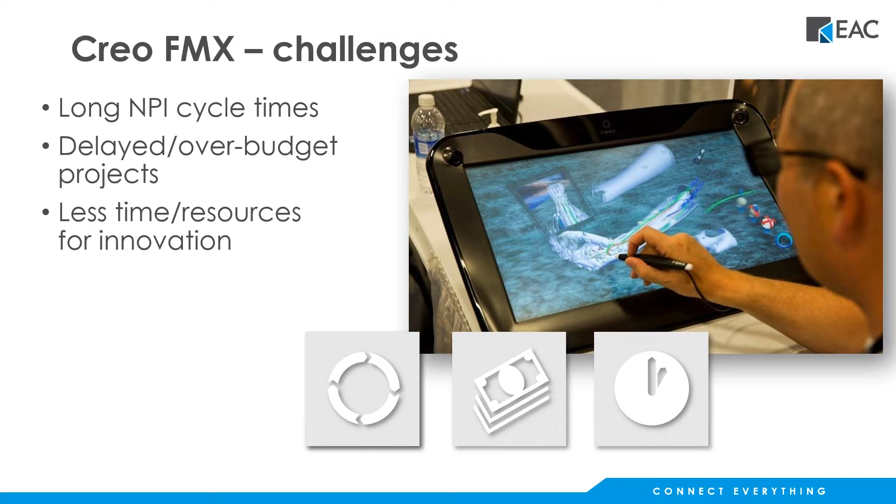What does that result in? Delays, over budget as far as costs and that type of thing. You run out of time towards the end of the project, and it takes away from your ability to innovate, and it just is not the most cost-effective or most efficient way to actually do product development. So what happens? You potentially lose out on market share or profitability, and you're not making as much as you probably could. So enter into the scene Creo's Flexible Modeling Extension.

So on this screen, we've got several different images here, and it flows from upper left to lower right. And what we're really showing here, and I'll show this to you live in the software, is working with the geometry and doing direct modeling changes to it. So you can recognize different pieces of the geometry as cuts and bosses and those types of things, and then move those things around dynamically and interactively to put them where you'd like them to be. And this could be done on both Creo native data, or it could be done on non-native data as well.

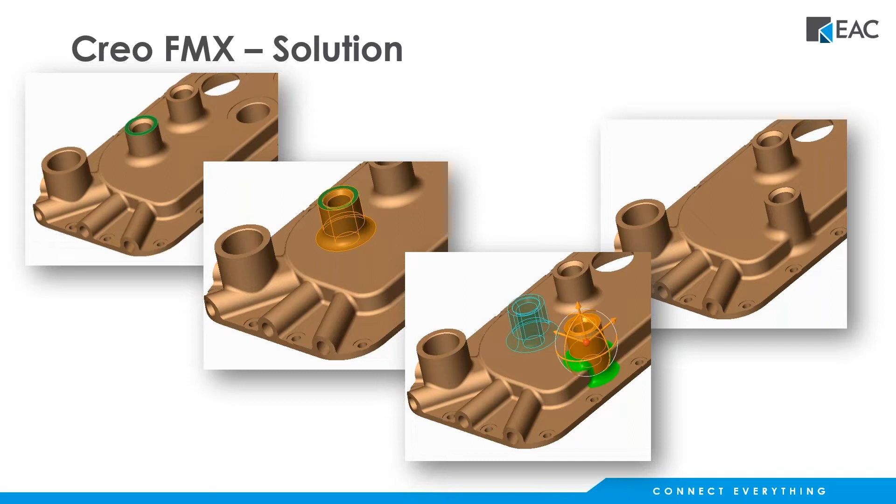So it's some nice functionality that we'll show you live here in just a little bit to do those late stage design changes or work with non-native data. So a little bit about the user interface. What does this look like inside Creo? I'll highlight this when we get into Creo here in just a minute.

But in the upper left-hand corner of the ribbon, when you click on the Flexible Modeling tab, you're going to see the selector or the collector up there at the top. And it's going to be grayed out by default when you start because you haven't selected any geometry. So don't let that trip you up, right? You need to actually select some piece of geometry first before that collector actually lights up and allows you to specify how you want to recognize that piece of geometry.

You also have the ability to recognize patterns and symmetry along with additional geometry types, things like rounds and chamfers, and you can manipulate those items in a really easy to use fashion. Obviously, it's directly inside Creo Parametric, so it's seamless, right? You don't necessarily have to do anything other than click on a different tab inside Creo to get to that flexible modeling functionality.

Note that this will only be available for you while you're either in a part by itself or you have activated a part in an assembly. Otherwise, that flexible modeling tab won't be available. You won't see it because it doesn't make sense to do that in the context of an assembly.

Fast intelligent geometry selection, again, we'll show you what that looks like here, but you basically touch off on a piece of geometry and it recognizes that, and you can specify whether you'd like that to be a cut or a collected series of surfaces that behave as a cut or a round or a chamfer.

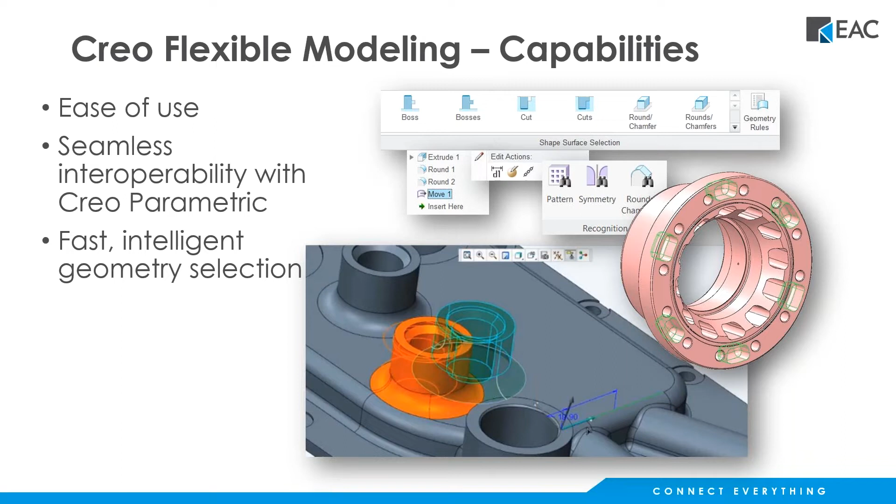Capabilities, additionally, you can recognize patterns, right? So in this case, you can start off with a piece of imported geometry and it'll go ahead and find those other pieces of geometry, whether that's a pattern or if you've got chamfers or rounds or things like that. So you'll be directly modeling and working with the 3D geometry that's inside your solid model.

So that is one thing, you're definitely going to want to have these models be solid. So if you have to heal them up with an import data doctor or something else like that, get that model so it's solidifiable. You'll need to do that before you can do any work with the flexible modeling functionality.

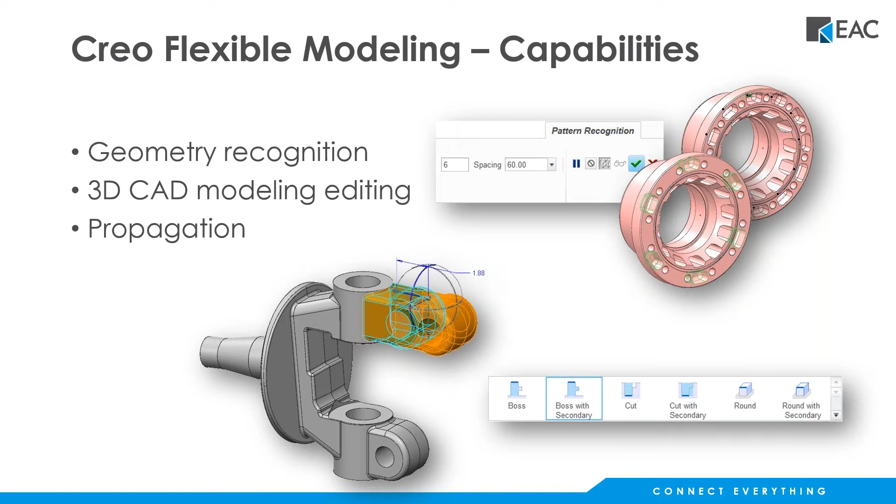Propagation, what we're talking about there is actually recognizing that pattern and then it allows you to edit the pattern. So if you wanted to change the pattern count from 3 to 6 to 12 or whatever, it's just as if you've created that pattern directly inside Creo, even though you started off with say some imported geometry or something like that. So you have the ability to recognize the pattern and then edit that and manipulate that as you need to update your design.

So sort of a summary slide. We have really 2 or 3 different things to talk about. So I'm going to do the slide piece first and then get into the actual presentation and the software afterwards. So summarizing, what have we talked about so far? Creo flexible modeling. The real focus here is on allowing you to work with the model, directly moving geometry. So you're not necessarily editing and redefining features. You can work with geometry as sort of blocks and groups and kind of manipulate them as a whole unit.

And you can do that with either non-native data or native Creo data as a late stage design change. So you don't have to go back and worry about connecting up a series of features and editing the definition to get where you want to go. And the whole purpose for that, reduce your product development time and cost. So you can reutilize that CAD model, maybe make a modification to that and quickly and easily make that change and then not have to spend a bunch of time editing and redefining features. Which can be done, but maybe you're working with imported geometry, so you don't have the luxury of having direct access to those features.

And improving product quality, right, gives you the opportunity to work with different design alternatives, thinking about different ways you can innovate. Remember that this can be done in conjunction with other Creo functionality like design exploration. So you could have different checkpoints along the way where you use your flexible modeling functionality to move or redefine or relocate geometry and have that be different scenarios in your design exploration session. So you can look at different design alternatives by moving the geometry and changing it via flexible modeling.

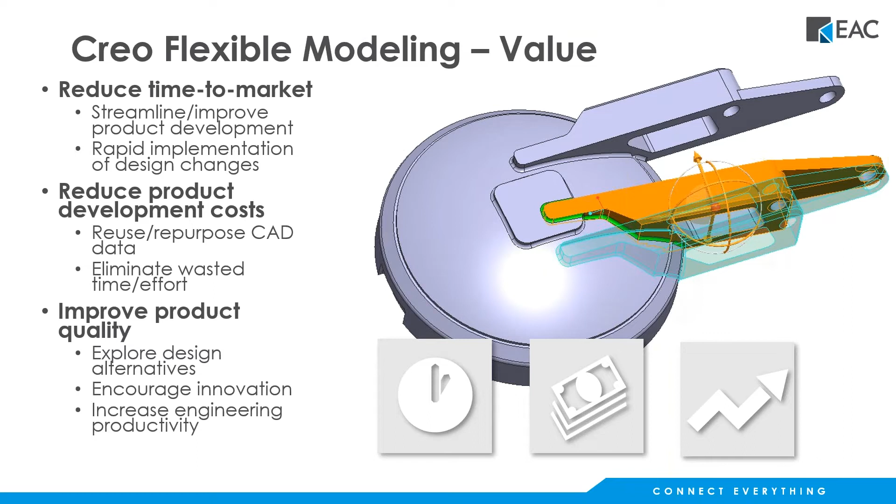Okay, so that's the first piece. The second thing we'll talk about, I apologize for all the PowerPoint up front. What we'll do is we'll string this all together in PowerPoint and then we'll get right into the software after that. So Unite functionality, what's this all about?

Well, thinking in terms of data exchange between different CAD systems, wouldn't it be nice if everybody was on the same page as far as working with Creo data, and everybody in the world used Creo, and then we wouldn't have to worry about this whole issue of data translation between different CAD platforms and systems. Well, that's not reality. It's not the case. It's probably also not practical, right?

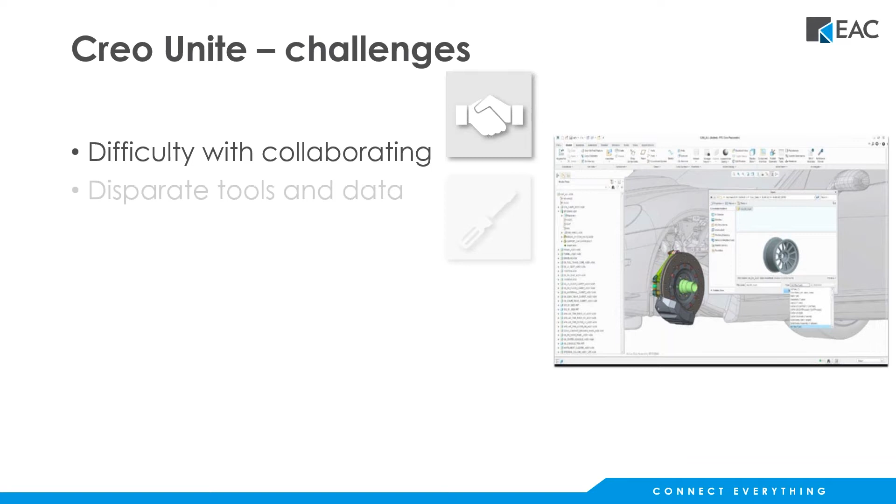So everybody has potentially different design tools that they want to work with, and what the Unite functionality is really all about is bringing that information together. So now you can more easily collaborate instead of having to, like we said a few minutes ago, revert to the lowest common denominator with sort of an industry standard STEP or IGES or some other file format. Let's see if we can find a way to actually collaborate and work together with these different types of data inside one system.

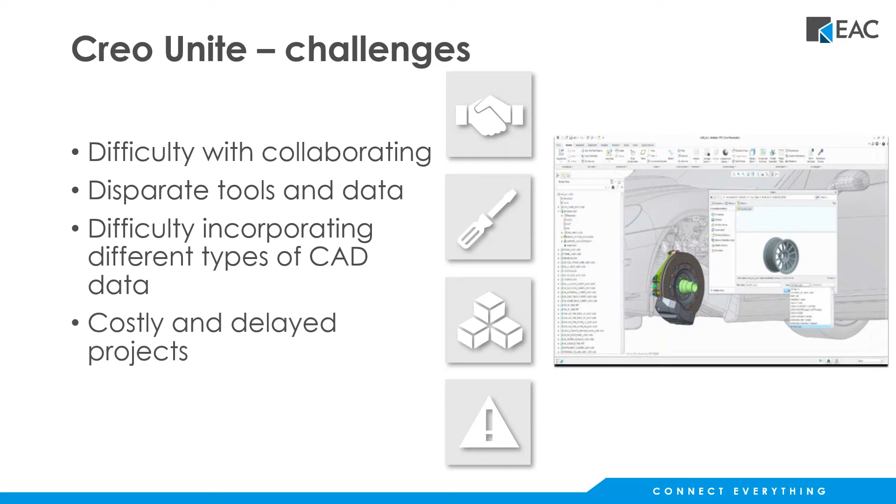So we'll just build out the rest of the slide. There's not everybody, but there's lots of different design tools that can be used. And we have a difficulty in incorporating these different file formats together. And obviously that can result in increased cost and stretched out timeframes and projects being missed because timelines can't be met because you're having to wrestle with this non-native data.

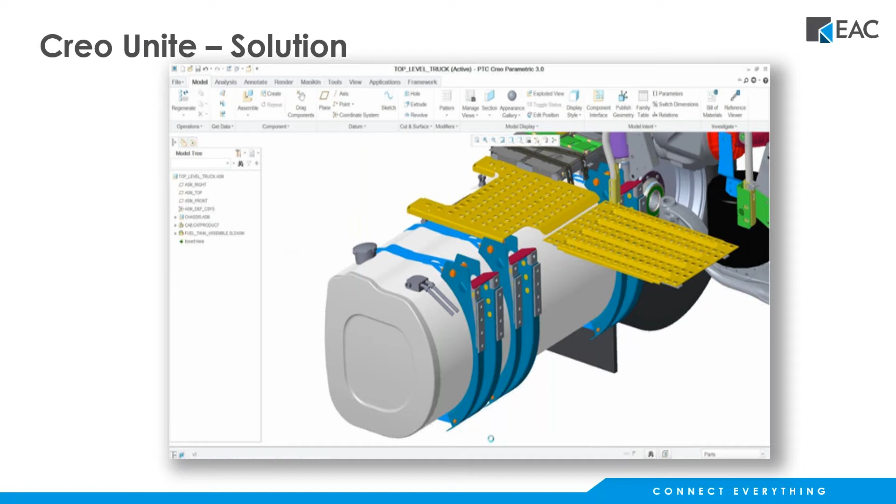So what are we showing on this particular screenshot? Well, it's a little tough to tell in the model tree, but if you kind of squint a little bit there, what we're really showing is this Creo assembly. But over here we have Creo components, and then we have SolidWorks and NX type different components and subassemblies all living together inside your Creo assembly. And so that's just kind of a snapshot of what it looks like inside Creo.

And so they can live together in the same assembly, and you can manipulate them just as if you would with native Creo functionality. You're not necessarily going to see the features in the model tree, but you'll have the geometry that's there. And because we just talked about the flexible modeling aspect of things, you'll still be able to make modifications to those components using flexible modeling.

How does it work? File open, right? So it's just as if you're going to open that component up inside Creo as if it was a native component. File open, or you can assemble and then specify the type of component that you're looking for. What I typically do is set my selection filter to look for the type of object that I want to open. So if I'm looking for a SolidWorks part or a SolidWorks assembly or NX type object or what have you, I set the selection filter so that it looks specifically just for those types of objects. Because by default, Creo is going to look for its own type of things first, but you can narrow the scope of what it's going to look for by setting that selection filter when you do the file open.

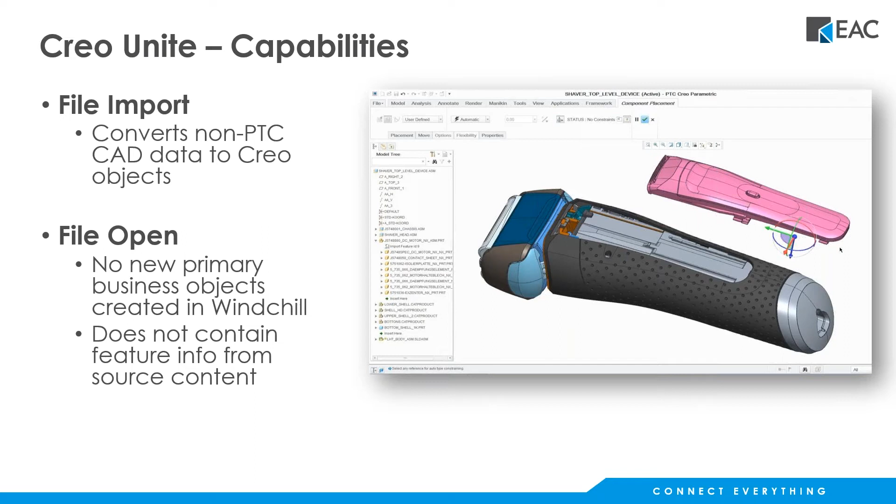You can import or bring in these non-native files, but additionally, you can write out these different file formats. So that means that you can bring in a SolidWorks object into your Creo assembly, manipulate it, do what you want to do with it, make modifications using flexible modeling. And then you can save that off as an NX file or a CATIA file if you want. And you don't have to have a seat of NX or CATIA on your machine. So you can just write out that different file format simply by selecting the type of object that you want to create when you save that object.

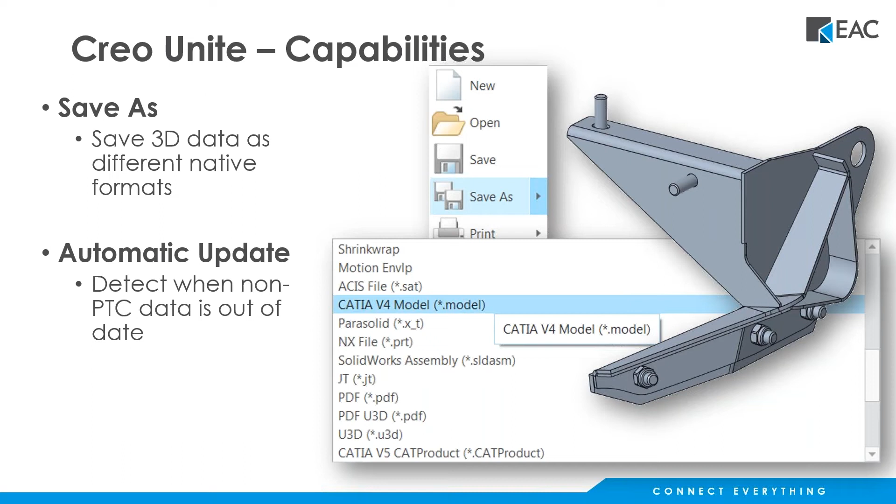And automatic update. So there's the associativity aspect of things, right? So if a change is detected when you make a modification to your non-PTC data, make a change to that part, it'll automatically detect that and update your model based on those changes that were made to that part.

So in summary, it allows you to bring in and integrate these other different file formats together into one sort of seamless environment where you can continue your product development process and integrate the different objects into your design. So again, consolidate multi-CAD data. Again, I've probably talked ahead of my slides here, but this just sort of summarizes the things that we've talked about so far.

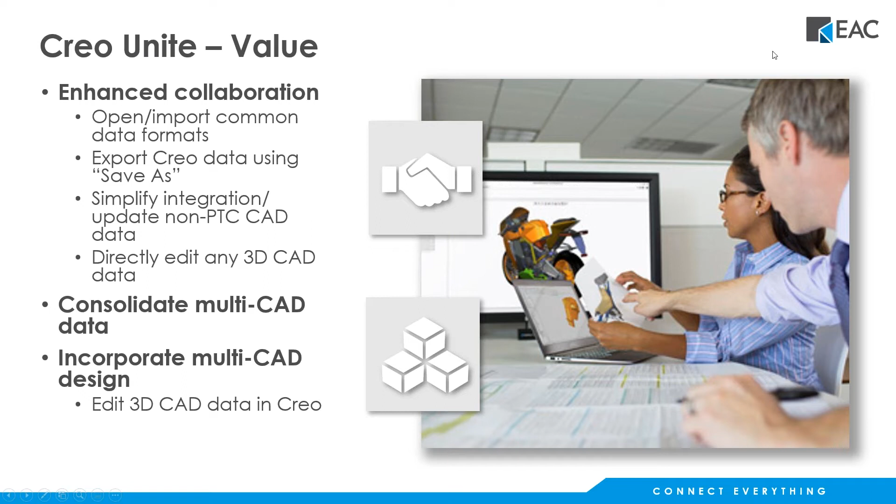Questions on anything so far that's popped up, Edison? Nope, I don't see anything. All right, let's keep going then.

I'm going to go ahead and get rid of the PowerPoint because we're more interested in seeing what's going on here inside Creo than we are in PowerPoint. So let's go ahead here, and I'm just going to show you a couple of things first. The first thing I want to do is go to the options, and this is something that a lot of people don't necessarily know about, and that's why we're gathered today to talk about it. I'm going to go to options and look at the data exchange.

So a lot of times when you're working with non-native data, a lot of people will just do a file open, and they'll just open up that STEP or IGES file, and then they'll say, oh gosh, I didn't get my datums, I didn't get my layers, I didn't get all that stuff that comes along with your start model. And that's kind of a bummer because then you have to go back in, and sometimes people write a map key to go in and insert all that stuff. Well, that's kind of a hassle.

If you go to this data exchange tab though, you can actually pre-specify what you want to happen when you open up these different types of objects. So you can set this up here and you pick the type of file format that you want to specify or work with. So in this case, if I say STEP, I've got this import profile that I've defined for that. And I've just browsed out to that. I've just saved this here in this location. So you simply point to that.

But what happens is, if I just do a file open, we'll show you what that looks like. We'll say file open. I'm going to look for a STEP file here, for example. I'll go ahead and just pick on this STEP file. And so this is what pops up. And so what that profile does is it basically defines what's going on inside this little dialog box when you open it up.

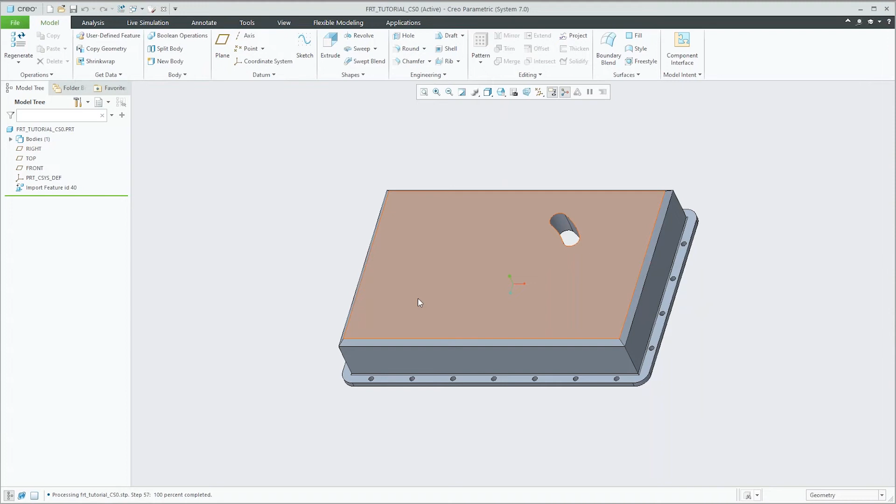So go ahead and do that, right? So just bring in that STEP file and notice what it did, right? It grabbed items. If I take a look at my layers, all of those layers are there. If I go back here to my named views, they're all going to be there. If I had parameters and things like that, they're also going to be there. So here, if we look at our parameters, we have these different parameters that come along with that.

So that's the first thing. I find a lot of people will do one of two things. They'll do a file open and just grab the STEP file and don't bother with the template, and then they'll have to struggle with these items, or they'll say file new, create a new part, and then do an import. So that looks like this. If I say file new, and I just grab all my default stuff here, and then they'll say get data, do an import, and go grab the STEP file. They both accomplish the same thing, but if you do that with a template directly, it speeds up that process.

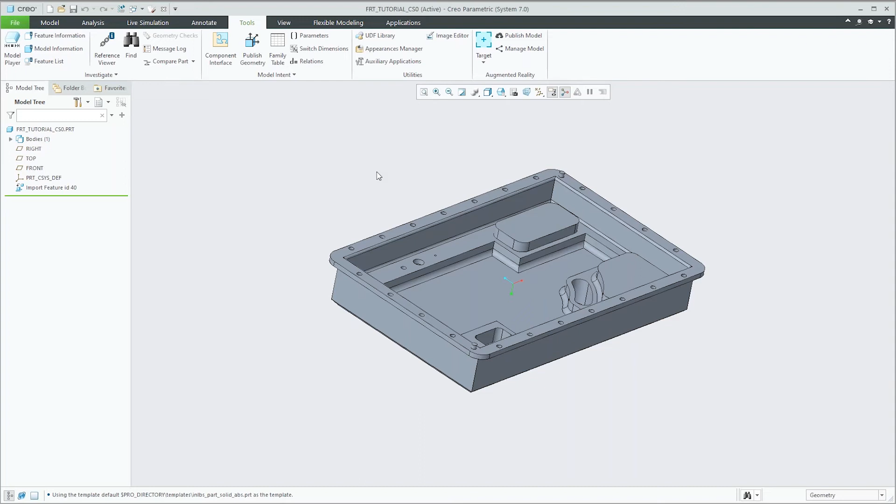Okay, so that's a little bit on the data exchange. That's not really specific to flexible modeling or Unite functionality, but more general day-to-day operation of Creo and how you can set things up. So we've read in the STEP file, and what can we do next with it?

If I go back to the model tab and go to get data, you'll see that I've got something called feature recognition. You're probably not going to have this by default. This is functionality that's been around since Wildfire 4, so it predates Creo. It lets you look at the geometry and see if we can interpret or understand things like extrudes or holes or fillets or chamfers or slots. It'll read through that geometry, and if I pick on this surface, it'll identify different extrudes.

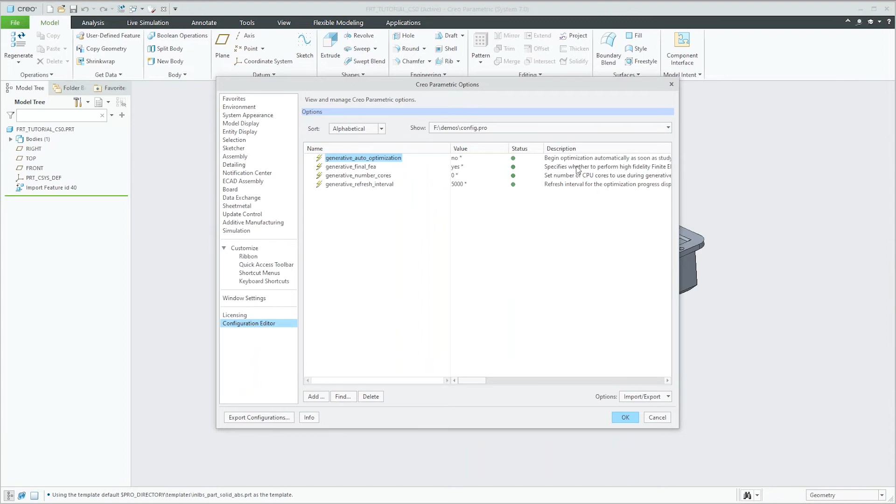So I said you probably won't see that by default. How do we fix that? Again, it's a configuration option. We go to options, go to our configuration editor, and I'm just going to go to current session. The one you're looking for is called FRT_enabled, short for feature recognition tool. If you just do a search on FRT, you want to turn that on. That will give you this little flyout menu functionality here. If you include that in your config.pro, you'll have to restart Creo for that to take, but then your next session will have that.

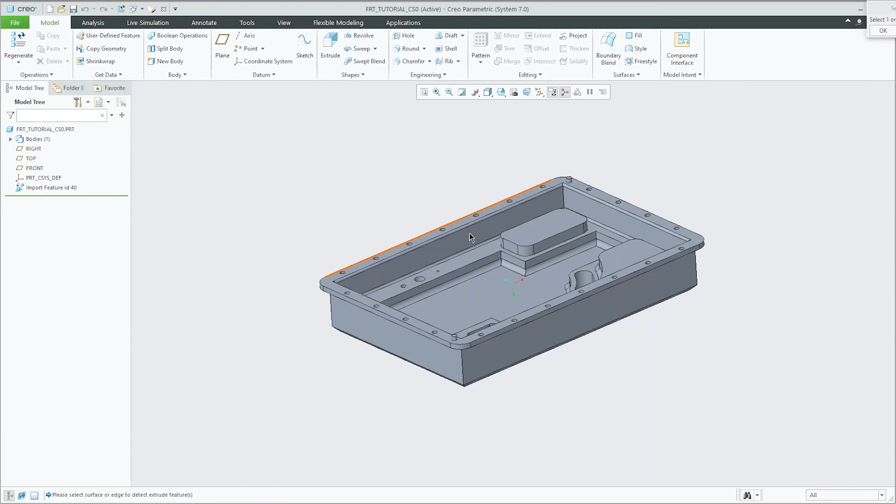So let's show you what it looks like. If we go to search extrude, all I'm going to do is pick on this one surface and hit OK. Maybe you saw on the web there that it blinked, and then it did some stuff. We have some additional features now in the model tree. What that effectively does is it says, okay, if I look at this surface, what intersecting features do I see that could be created as an extrude type feature?

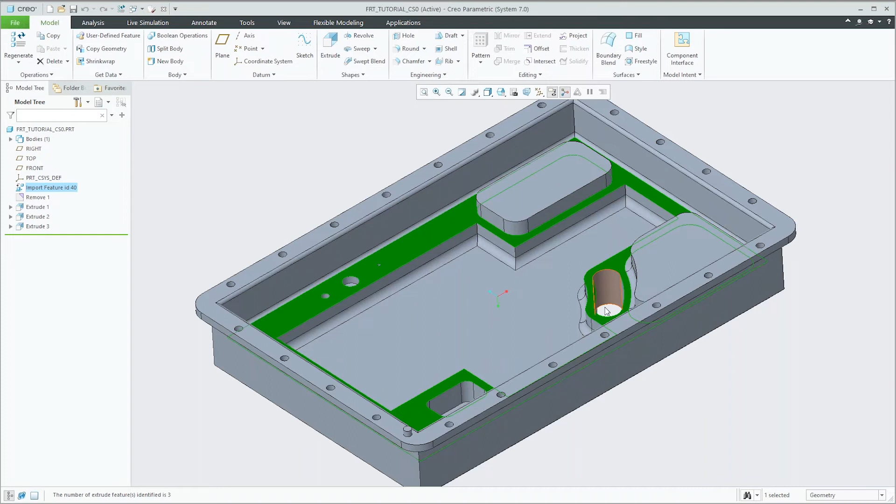Well, if I just scan this, I can see that I've got this little island up here, this little jelly bean cutout here, and a little pocket here. And so that's effectively what Creo did with the feature recognition tool. It said, okay, I can see that that's an extrude type feature, and so it builds that for you.

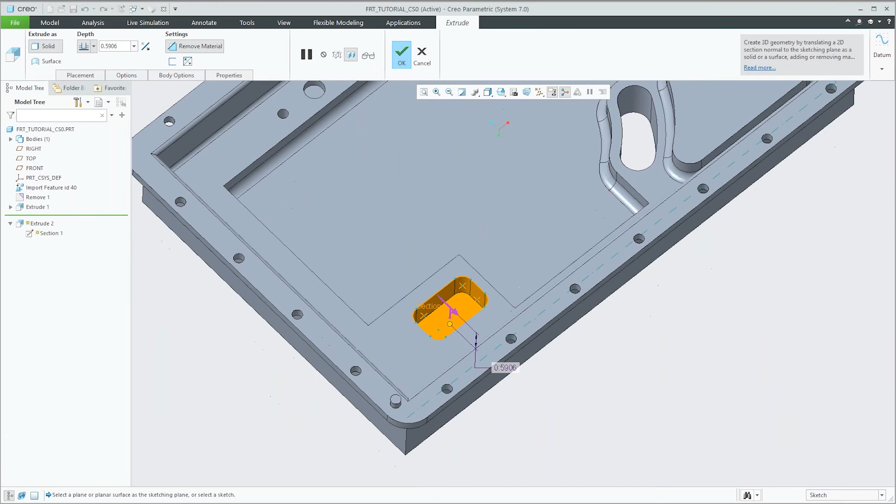And if I edit the definition of that, remember we started as a step file, and now I have this little pocket shaped feature. And if I hit the right button here, we'll drag that up and scale that. So what this is showing me here is I've got a Creo type feature with a sketch. So if I wanted to go back in and edit the sketch, I can do that.

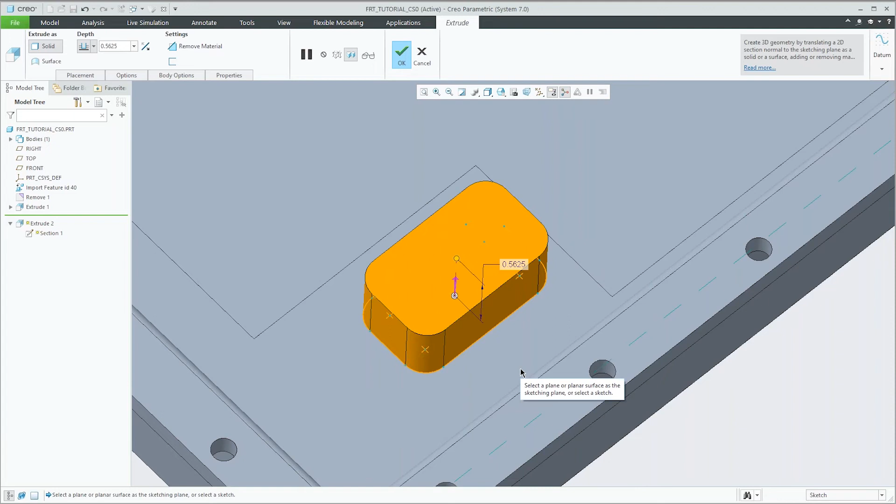Right, so I've got all my references. So this behaves as if it's an exact or a native Creo type feature. And with my dashboard, I can change that from a cut to a protrusion using the drag handles. And I can do whatever I want with that because it's effectively like a Creo feature, okay? Because it is a Creo feature. So that's the first thing.

The feature recognition tools allow me to do that kind of thing where I can scan through the geometry here, and I can look for things like extrudes and holes and fillets and chamfers and identify that, and then I can turn that into a Creo feature and manipulate that as I need, even though I started off with a step model initially. So that's feature recognition tools. So that's the next thing.

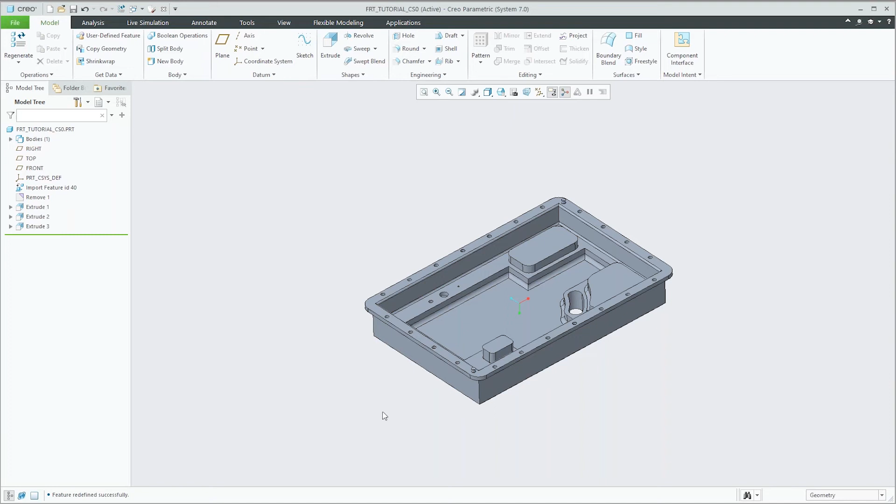I've got another model here. If we go ahead and take a look at this guy. So this was a SolidWorks part. I'm just going to go ahead and do a file open. And in this case, here's my selection filter. So if I want to look for, say, SolidWorks type files or CATIA files, I'll just go ahead and pick the item that I want to look for. In this case, if I look for SolidWorks parts, and if I go back here to my working directory, and let's see here.

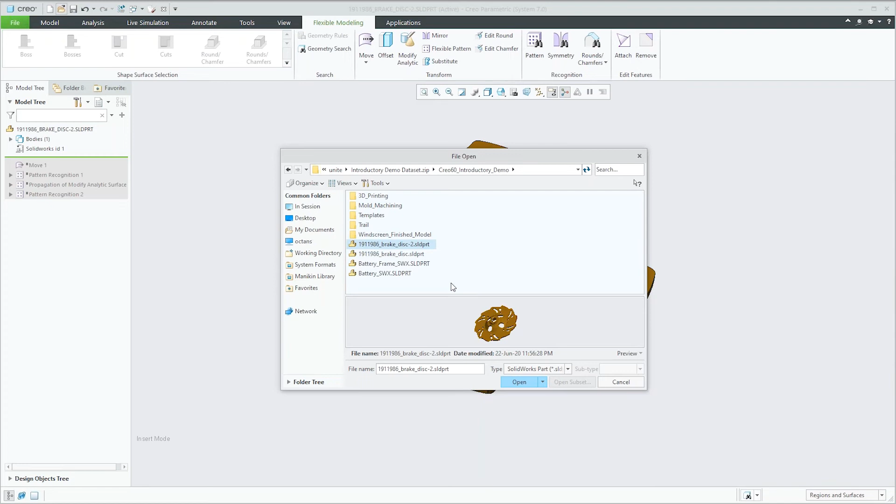Here in flexible modeling, and sorry, I've gotten off in the wrong direction here. Let's go to the Unite folder right in here. So this is my selection filter. I'm focusing just on SolidWorks type objects. So if I had other types of objects here, say NX, for example, or CATIA or what have you, I don't have any of those here, but that's changing my selection filter. So all I did was a file open on that, and I'm looking specifically just for SolidWorks type objects.

Now I've already gone to my flexible modeling tab. Since we're in part mode, we'll see that we have this flexible modeling tab right here. We click on that, and this is what I mentioned before in the PowerPoint portion of the presentation. This little selection filter up here is sort of grayed out. There isn't anything selected at this point. Well, that's because I haven't picked anything.

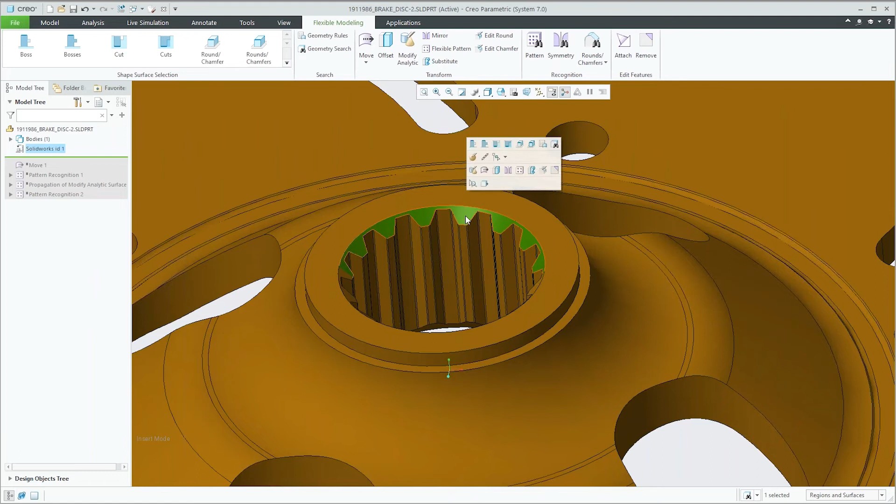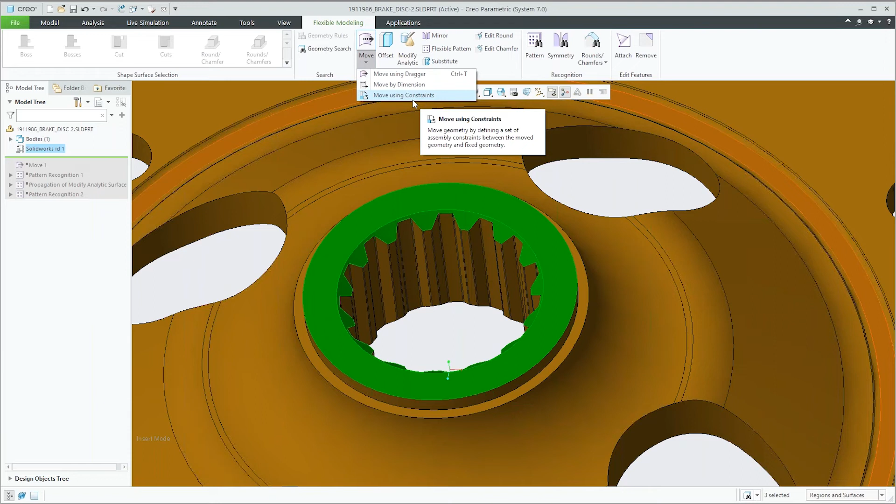But if I go back here and say, hey, I'd like to pick that surface, and I'm just going to grab the other surface here, you kind of see what I've selected. There's a little gear tooth top. And again, I'm just using the control button. And if I select those items and then treat that as a cut, then I can do other things with it. So I've got different objects I can move, different ways I can manipulate the geometry. I can move that with a dragger.

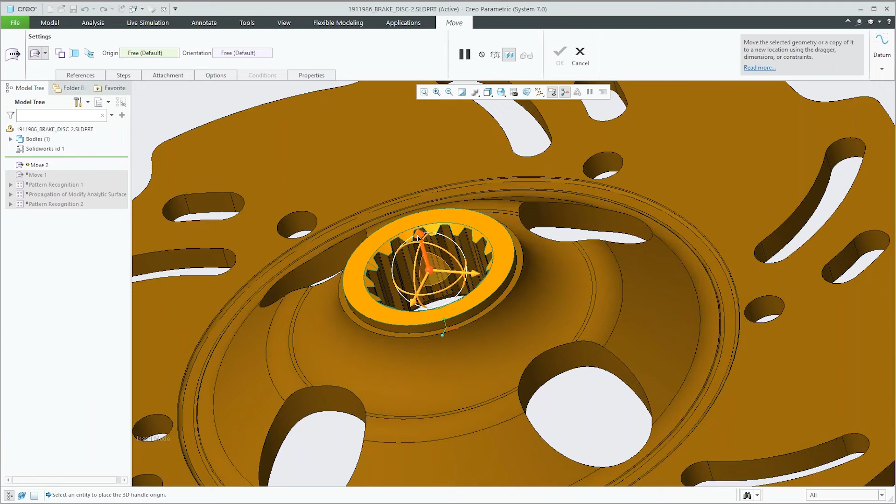And what happens then is I get a little gimbal that allows me to drag using the arrows or rotate with the hoops, or I can move this in plane by using the little planar webs between the different axes. And I can also do a free move by grabbing the center of the gimbal, the little red ball right there. So I simply just pull on the arrow, and it's going to drag that geometry up for me. And you can see now I've made that just a little bit taller.

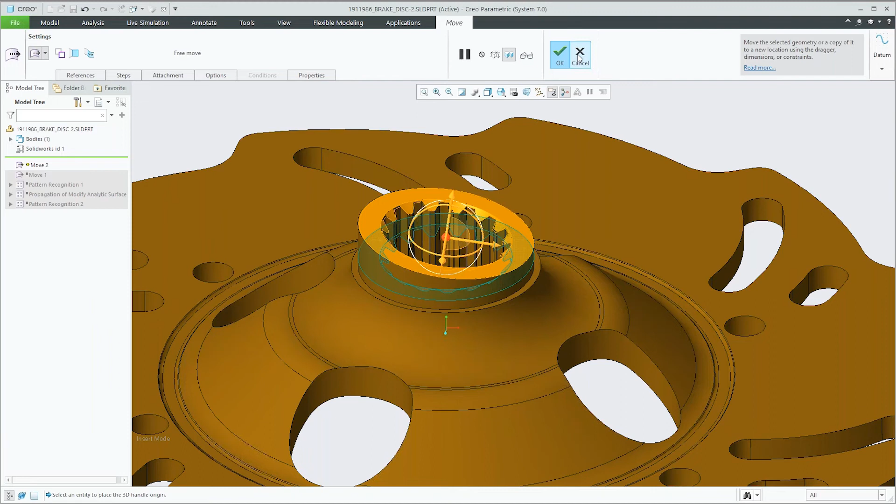Or if I wanted to rotate that over, it'll update that geometry for me that way. So it's direct manipulation of the geometry by selecting the surfaces that I want to manipulate, and then selecting how I want to work with that. Again, there's different options here in my selection filter, whether that's going to be a cut or a boss or different items like that. And then I can manipulate that geometry from there. So that's what I've done in that first option. I've got these items grayed out here because I'm going to step through them and show you how to do them and then show you the net result.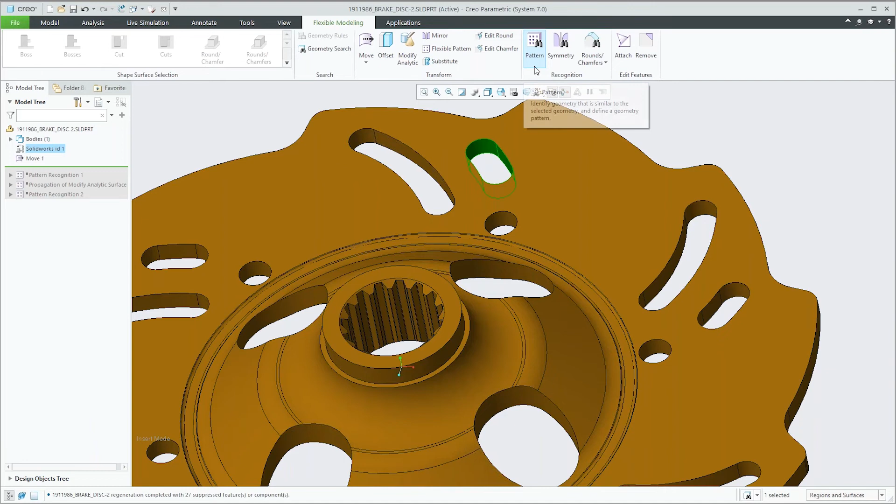So if I wanted to recognize a pattern, for example, let's go pick on a piece of geometry here. So if I select on this little surface right here, and if I take that as a cut, right, so I've just selected that. Now it's walked around the joining surfaces there and grabbed them all together, and I can treat that as a cut. Then if I say, hey, let's go ahead and recognize that as a pattern.

Now you can see there's little handles where that pattern instance would be. And then I can go here, so that's my reference, right? Then I can go back to my options and say, hey, I would like to allow the editing of that pattern. That allows me to go back here and say, I would like to have 12 of those. Now it's just as if I'm editing that pattern or creating that pattern inside Creo directly.

And I'm just going to go ahead and say, I want that to be 360 divided by 12. And then if I accept that, now I've got a modification to that pattern, right? So I've taken that non-native data and patternized that and done other things with it that I need to from there. So it's really pretty straightforward. You just pick on the geometry that you want to manipulate, and then do different things with it. So if I wanted to move with that dragger, I can do that.

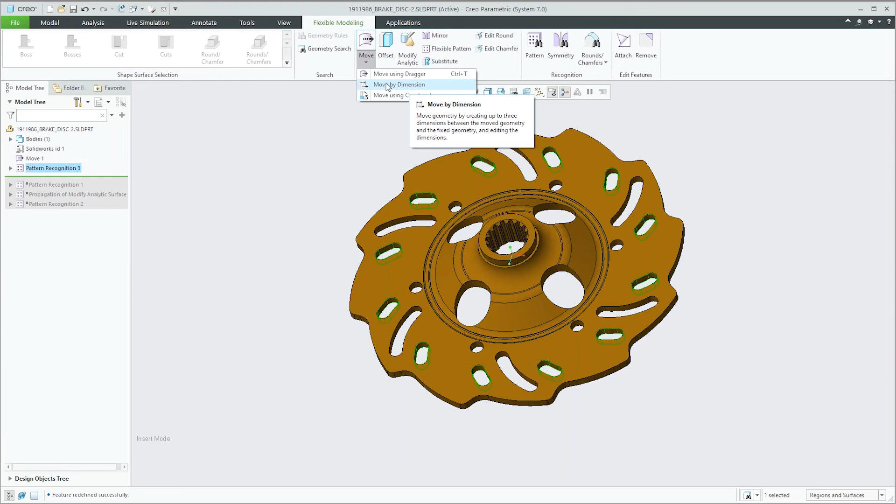If I want to move with dimensions, that allows me to create a dimension that I want to measure between some reference and the geometry, and I can very precisely locate that feature where I would like it to be. I can also do things like offsets. I'll just say I want to pick on that surface, and then I can offset that, and then I get a nice little drag handle here, so I can scale that up or down, right? So I'm making that little hole smaller.

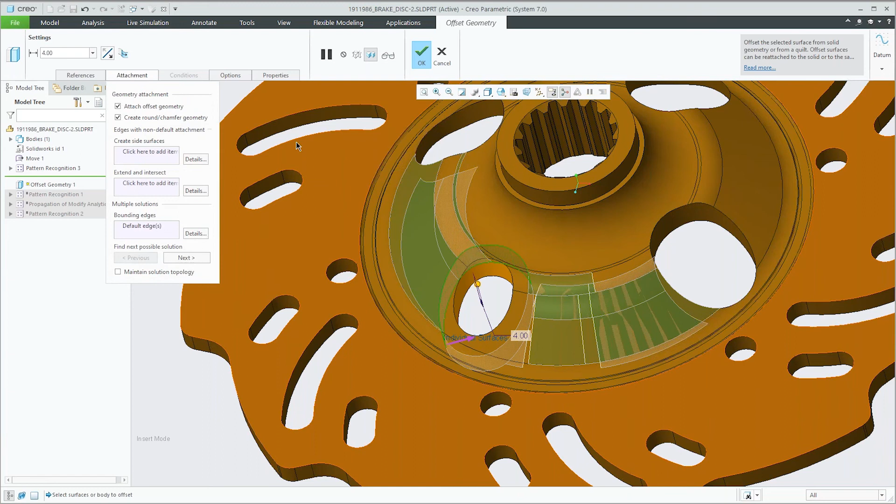And then on my attachments, I can say, hey, let's propagate that around to all the other instances in that pattern. So I don't have to do them individually, but I can make that offset adjustment to different features. So again, working with the non-native data, I have a great deal of flexibility with respect to what I do with the geometry, and so I don't have to go back and recreate it, or delete features and those types of things, and then recreate them.

So I'll pause for a breath here and check and see if there's any questions. Yeah, I don't see any questions in the queue right now.

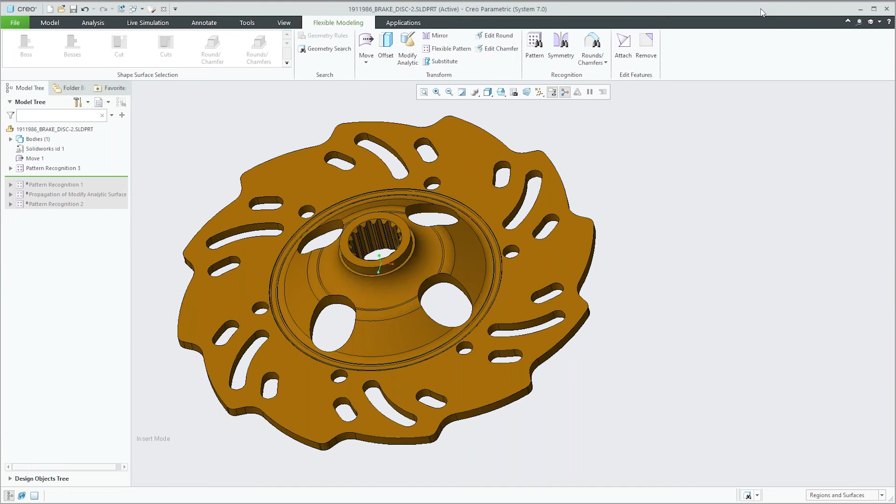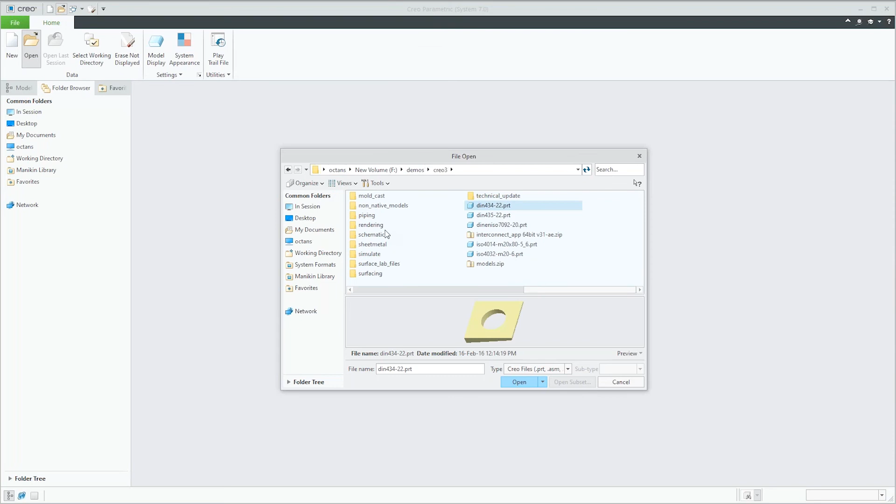All right. Well, that's really the quick overview. Again, wanted to show a little bit on the flexible modeling, the Unite functionality. Let's show one other thing here too, as far as showing how that works in the context of an assembly. Let me just go grab a different object to show you what that looks like. Give me just a second to drill into the folder. One more folder down. And we'll go grab this assembly.

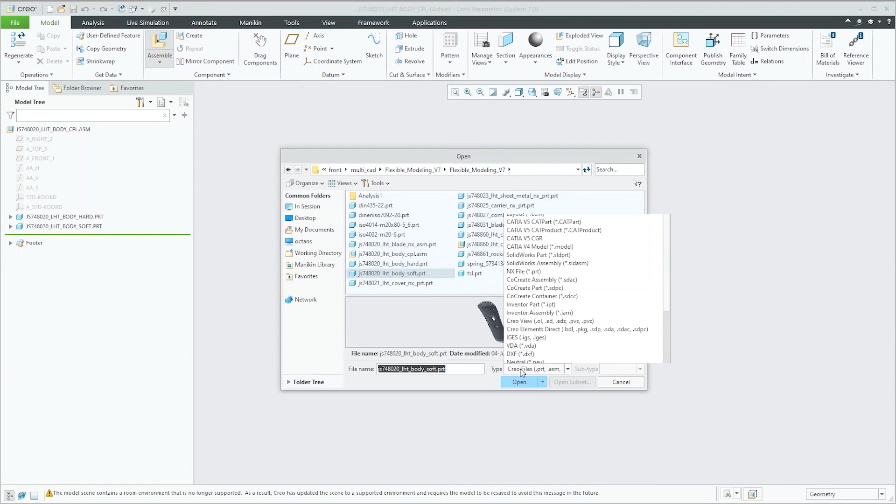Okay, so obviously a Creo type assembly with a couple of Creo type components. We'll show us assembling this. And again, I'm gonna go grab my SolidWorks information here. So I'm gonna go look for a SolidWorks subassembly, and you can see that I've got one of those right here. We'll just do a file open. And this ATB dialog box, that's short for the Associative Topology Bus.

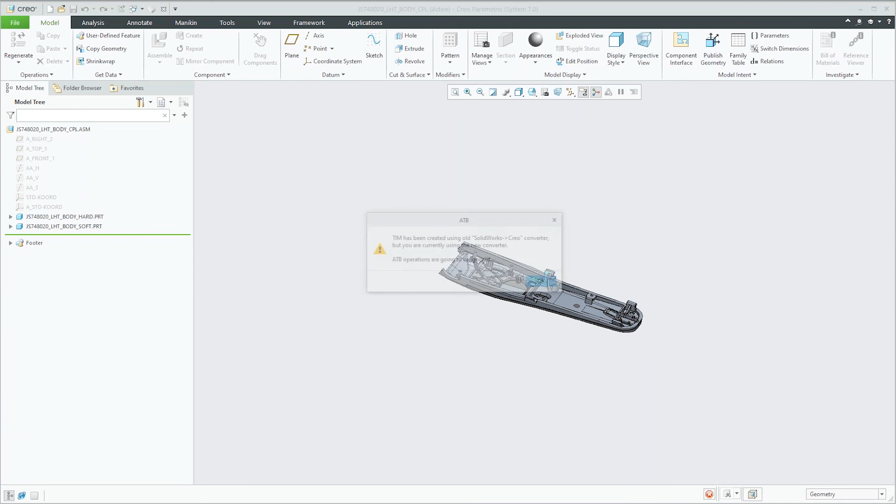I'm gonna get this little dialog box that pops up once for each of the components in this subassembly. So I'm gonna ignore the Associative Topology Bus options in this case, because I'm just bringing in that data. And now I'm gonna assemble it, right? Standard Creo functionality, I'm gonna use the default assembly placement. And from here, we can see I've now got a SolidWorks subassembly that's living in the same assembly.

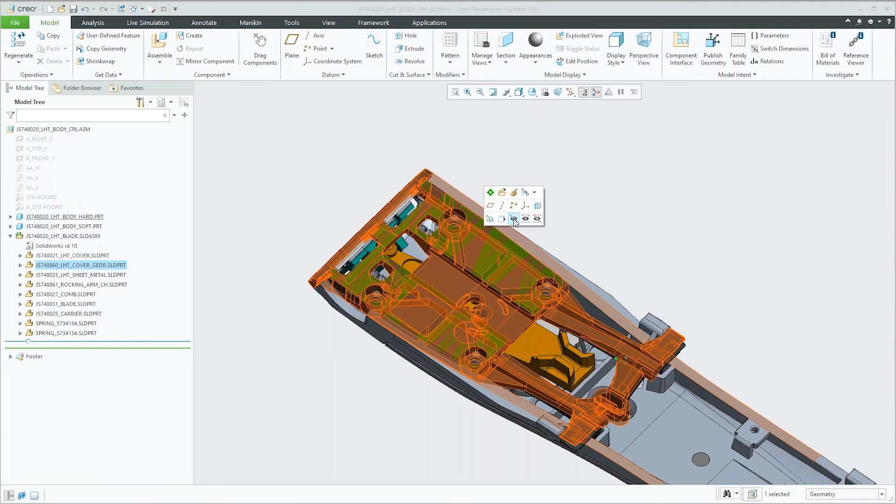Here's my Creo assembly. I can work with those components and do exactly what I would if it was a Creo type component. So I can just right click on that, hide that and drill down and then do what I need to do from there. So now in this case, I've already got a modification made to that.

But if we took a look at this rocking arm, I'm going to go ahead and just activate that just like I would as if it was a Creo part. And we're working in Creo 7. So I see that nice little phantom out of both my model tree and my objects in my assembly. So I'm focusing in just on this one component right here. And I've already done some feature recognition tools and some recognized geometry here for that.

But if I do something like this, right? So now I'm activating, I'm working with this SolidWorks component and making direct design changes to that SolidWorks object in the scope of my Creo assembly. So what I did was I recognized the chamfer for this. So I'll show you what that looks like. If I go back here to flexible modeling, and if I just go ahead and say, I'd like to make a modification to the size of that cylinder that's there, no problem. I can do that. I can say modify analytic and pick on this guy right there.

I'm going to get a nice little drag handle that I can kind of scale that up or scale that down. But notice what happens to that chamfer that's there. It sort of changes size. It's not really following the design intent of what's going on there, right? So let me cancel that and show you how you would more appropriately deal with that.

I'm going to go here to my recognition tools inside flexible modeling. I'm going to say, look for chamfers. Let's see if we can recognize that as a chamfer. So we pick off on that, and now that's going to behave as if that was a Creo chamfer that was built in that part, recognizes the dimensioning scheme for that.

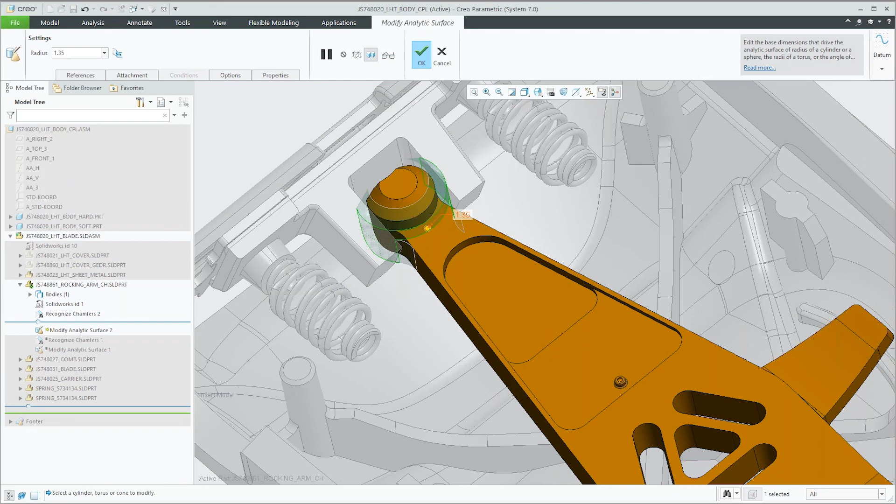And then now when we go back and say, let's modify the analytic, I'm just going to click off on that. So we'll modify the analytic, pick this, and now when I change the radius of that, it's going to maintain that design intent and keep that chamfer the same size. Now I can more appropriately scale that up. I can plug in a direct dimension for that, 1.35. And now it behaves as if it's a Creo model with Creo features, even though it's a SolidWorks type object that just happens to be in that assembly.

So that was one of the last things I was going to show you relative to bringing it all together, tying together the functionality of flexible modeling and Unite functionality in your Creo assemblies. So that's what I have for a presentation. Addison, if you want to, oh, you probably want the PowerPoint back, I'm guessing, right?

One sec, Todd. I have one question here. Sure. Can you try with Inventor part or assembly? We can. The challenge I have there is I don't have any Inventor data. So it's going to work the same. Unfortunately, with the data set that I have, I don't have any objects that are Inventor type files. But if somebody wants to send me something, we can take that question offline, and we can do a web meeting on a one-off kind of thing to show you how that works. I could save something off as Inventor data, but I don't have any Inventor data that I can directly access.